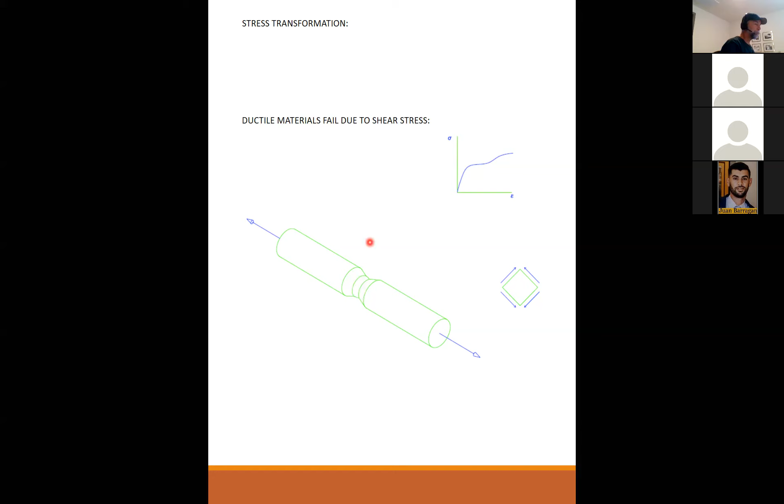Tensile loading causes the section to neck down and fail with a characteristic cupping due to shear stress.

So if you put a brittle material in torque, it's actually going to fail at a 45-degree angle. This is a diagram of our little stress element, and what it's saying is that it has plenty of shear stress capacity, but it's going to take this rotated coordinate system and fail along the principal stress of tension. This is why we're talking about principal stresses, because the material, if it is weakest in tension, will find that rotation that produces the greatest tensile component, and that's what it fails on. So in this case, it's at 45 degrees, because if you rotate this 45 degrees, you get the maximum principal stress.

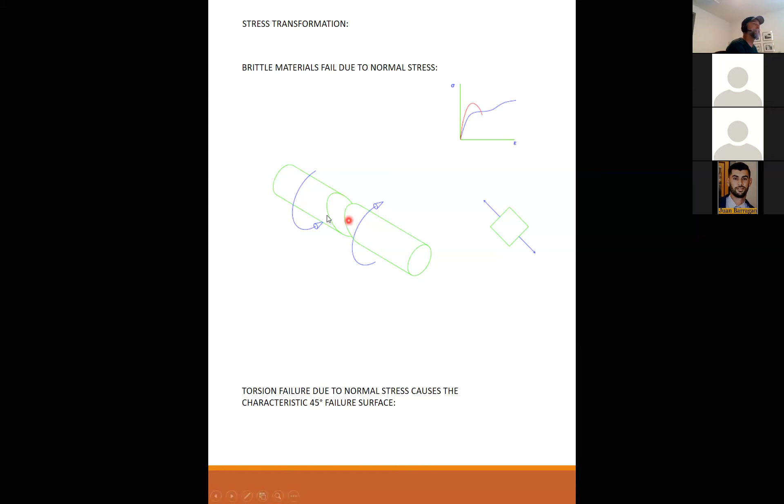If you want to see this, I still remember it like yesterday. When I took this class as an undergrad, back in the days of chalkboards, the professor took out a big stick of chalk and said, all right, you don't believe me? He twisted that piece of chalk and it broke, and he passed it around the class, and it looked exactly like that, because chalk is a brittle material.

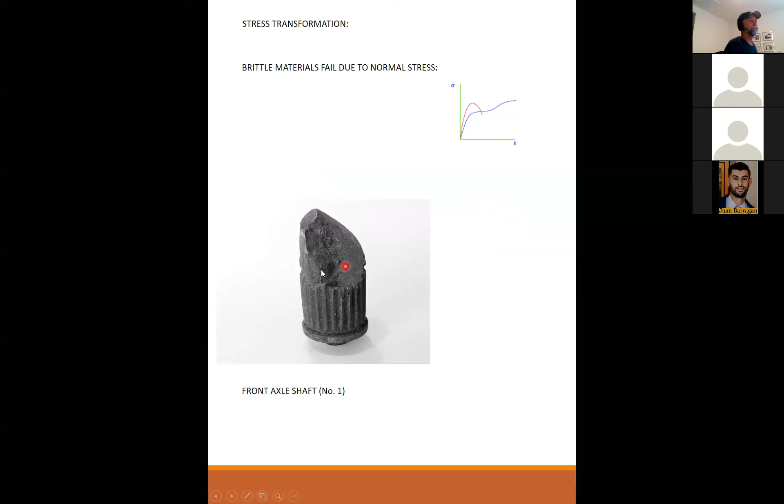Another real-world example: this is the failure surface of a front axle shaft from an undisclosed location of a Toyota 4x4. Front axles were not the strongest axles on the planet, so this is an example of a broken front axle shaft. From this diagram, would you say that my front axle shaft used to be brittle, or did it used to be ductile? The answer is it was rather brittle. It failed on a 45-degree surface, it's kind of hard to see, you have to hold it in your hand. And the grain of this, you can kind of see that it is actually a tensile failure. It fails in normal stress.

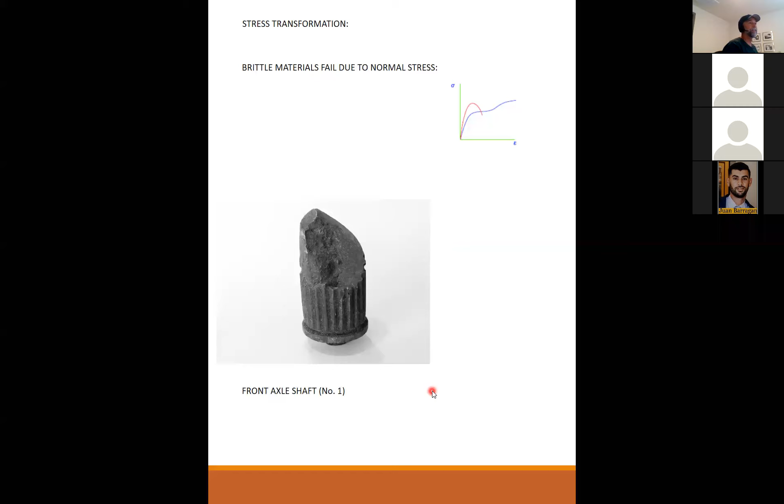I know what you're all thinking: how many axles did I go through? I went through 3 before I finally ponied up and got a whole new axle housing and chromoly, super duper warrantied-for-life axle shafts, and then I never broke another one.

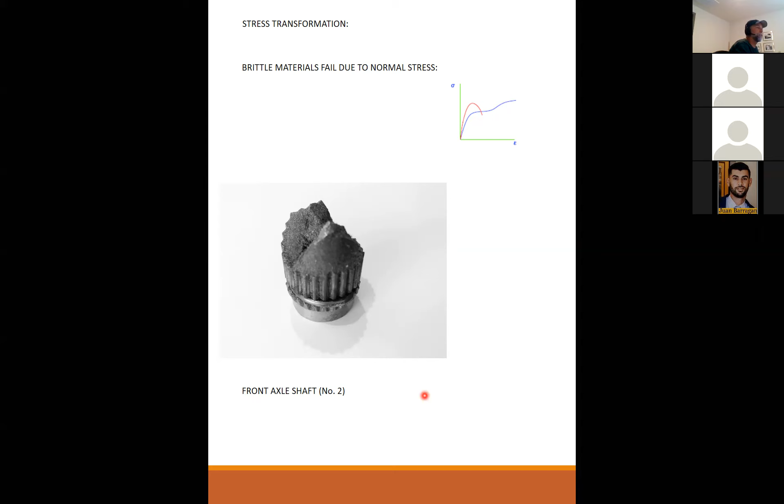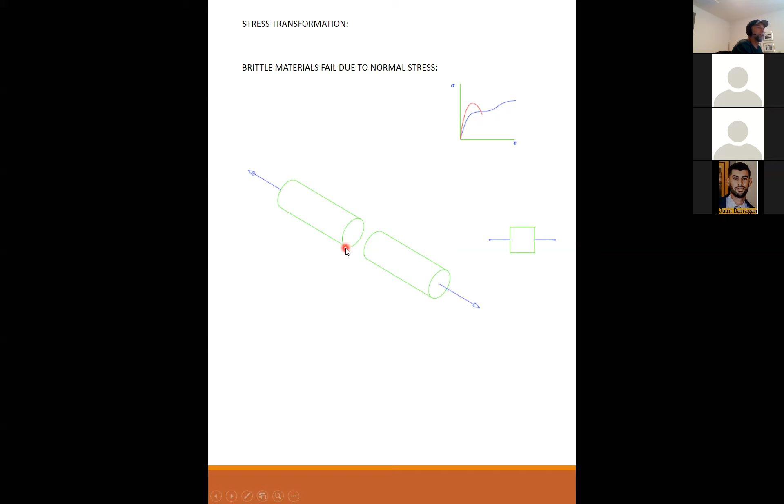And so if you take a brittle material and just pull it — picture this could be iron, or this could be just a cylinder of concrete — and you put it in straight tension, it will fail in a clean break, just like that.

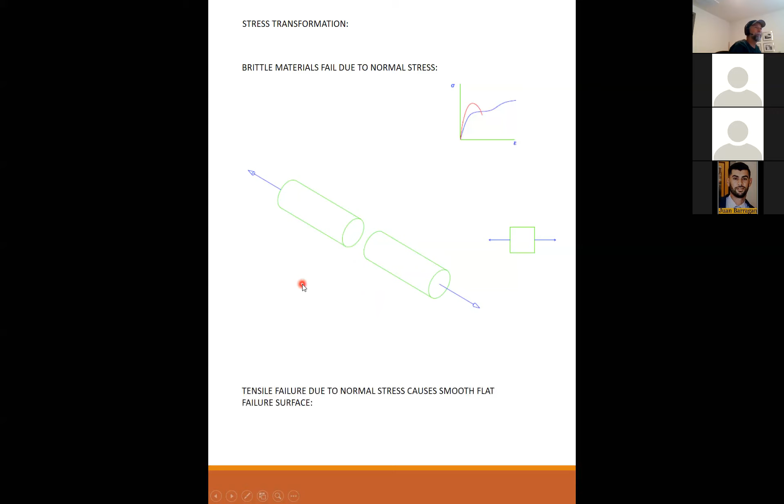Okay, any questions on brittle or ductile materials?

Anybody wondering why a steel axle shaft was brittle? Yes, why? Oh, from heat. Yes.

Steel axle shafts were hardened. So what they did is they took steel and hardened it through various processes of heat treatment and whatnot. The point was to make that axle strong. They really were trying to maximize the strength of that axle. But whenever you take a raw material and you either cold work it or heat treat it, or do these various industrial processes to raise the strength, you always give up ductility.

So actually I can go back. I won't take too much time on this, but right here, the blue line and the red line could almost be the same material. The blue line might be the raw steel in a very ductile form, but you could take the raw steel and cold work it or heat treat it. And this is the final strength there of the ductile material. This is the yield of the ductile material. And you can work it so that you can really get that strength up much higher than it was before.

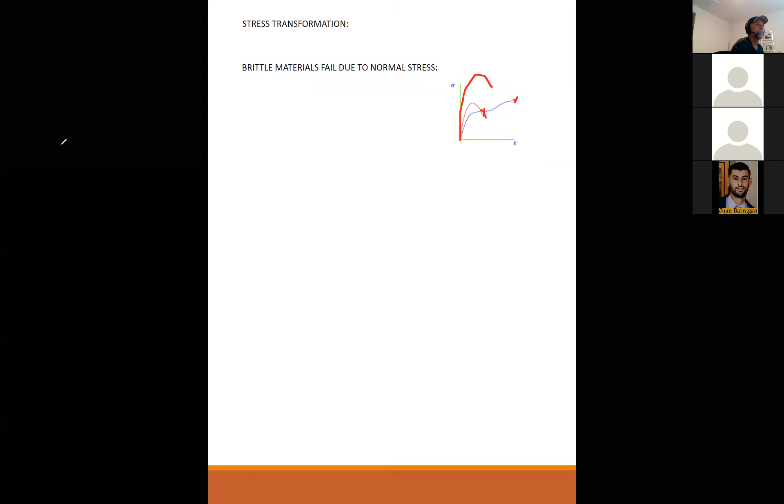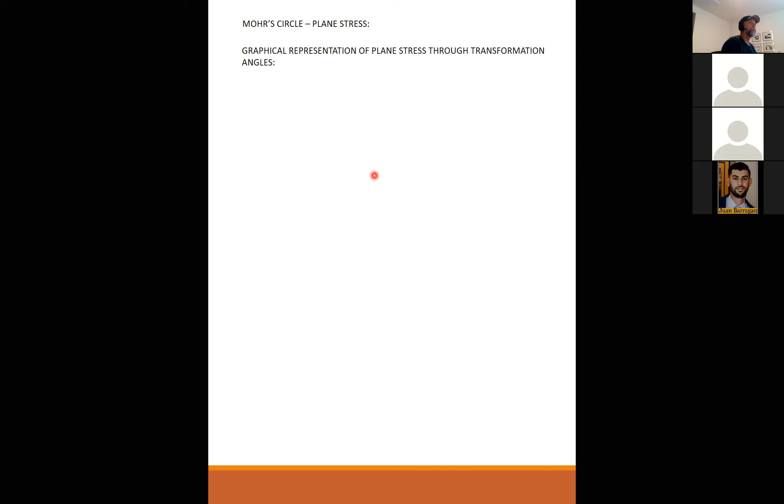Mohr's circle. This is our graphic way of describing stress transformation. So it's a graphical representation of plane stress through the transformation angles. Starting with our equation for transformed normal stress, this is our result from last time, that sigma x prime is equal to, this is basically the average stress, and then the transformation of the cosine and sine.

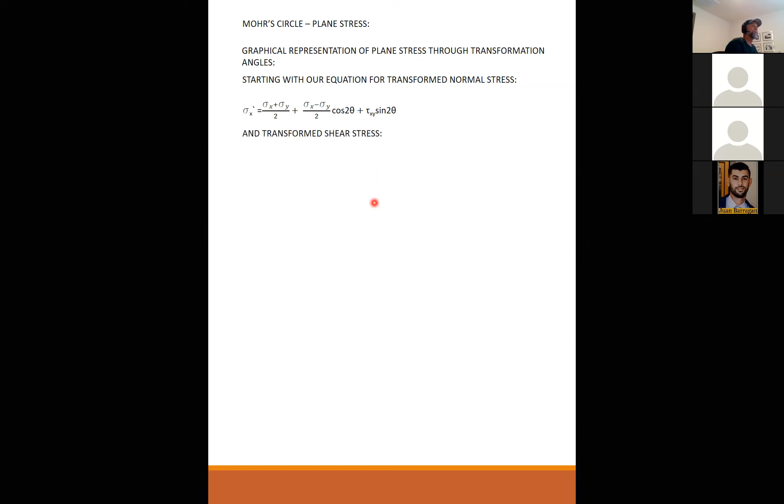We can start with this equation and the transformed shear stress, tau x prime y prime. And by squaring and adding each equation, we can eliminate theta. So we can combine these two equations and basically wash out theta. And by doing so, we get this, a squared term and a squared term, squared term, squared term. And since sigma x, sigma y, and tau xy are all known constants of the problem, that's the beginning of the problem, then we can rewrite this whole thing...

...as sigma x prime minus sigma average squared plus tau x prime y prime squared is equal to r squared, where sigma average is sigma x plus sigma y over 2, and r is equal to, so I just basically squared this whole part, rewrote this. So the radius of a circle is equal to these terms in here. And sigma average becomes the center of the circle, and r becomes the radius of a circle. That graphically represents the transformed stress state.

Any questions so far?

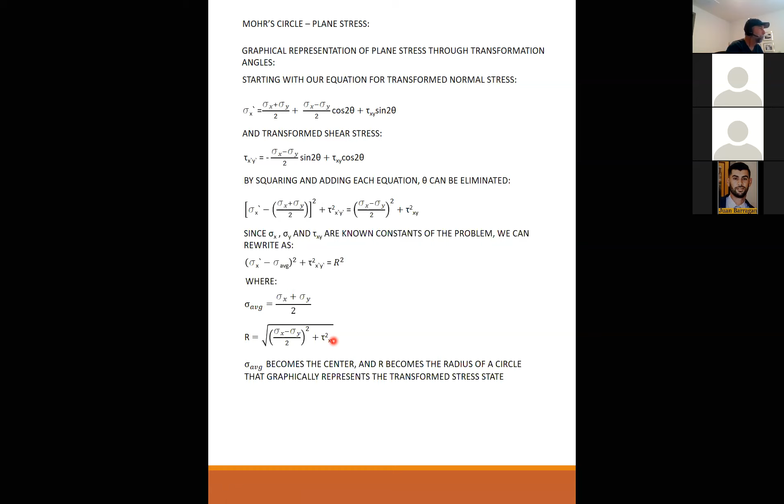Okay, so how do we do it? How do we plot Mohr's circle? First, we construct a positive coordinate system. And this is the part that usually throws everybody for a loop. This horizontal axis is normal stress. The vertical axis is shear stress, and it is positive going down.

Why is it positive going down? Because if Mr. Mohr had made it positive going up, then it would have the wrong direction in the positive rotation. I think that's why. So really, this is just the way it has to be in order for it to make any sense. But remember, positive down for the shear stress, positive to the right for normal stress.

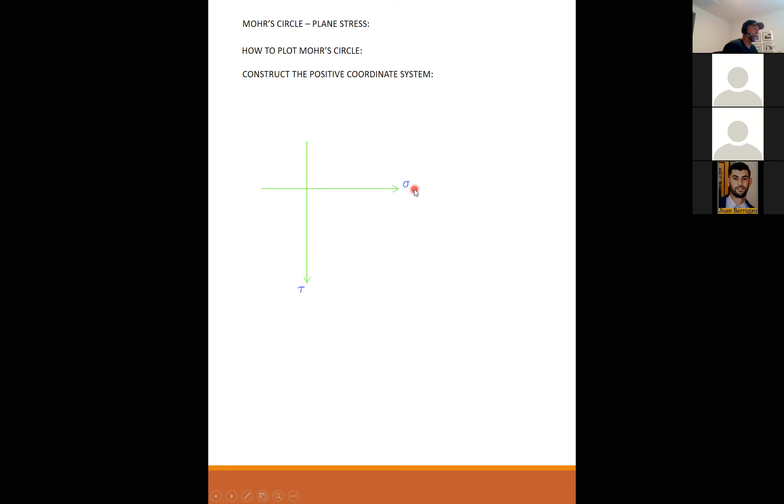Positive normal, positive shear. The angle on this circle that you're about to see, the angle that's in this circle is going to be 2 theta. Just like in the equations, it was 2 theta. This angle is going to be 2 theta.

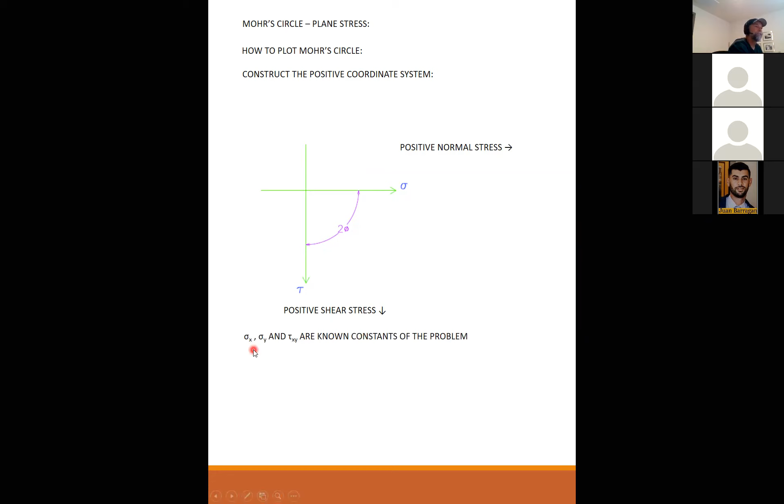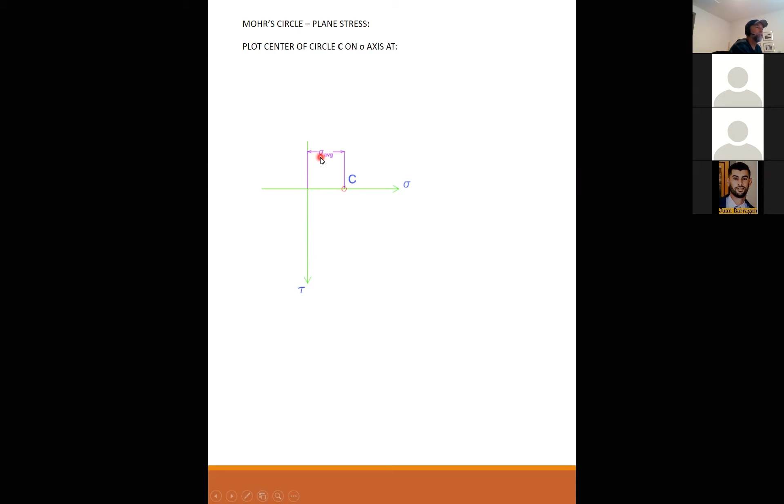Again, sigma x, sigma y, and tau xy are known constants of the problem. So we start by plotting the center C on the sigma axis. So this is 0, 0 at the crosshairs. And so we go in the positive direction, sigma x plus sigma y over 2, sigma average.

Next, we're going to plot our reference point A at sigma x, tau xy. Remember, these are known quantities from the problem statement. So if sigma x is positive, I go over in the positive direction. If tau xy is positive, I go in the positive tau direction, and I plot point A.

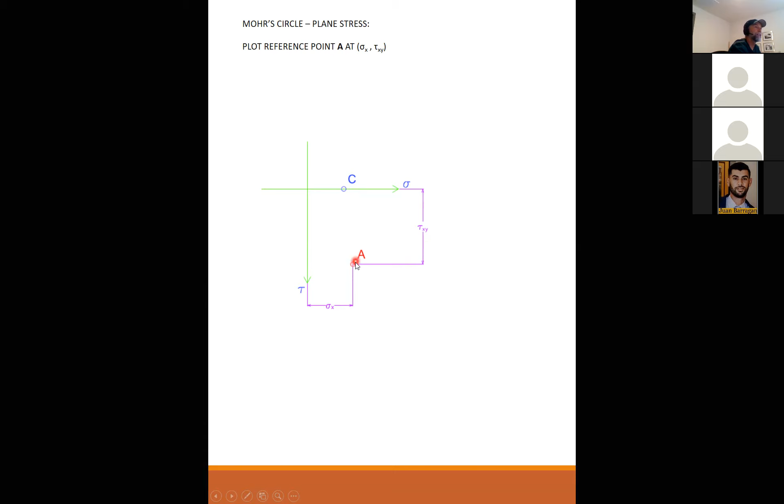Then if I connect a line between C and A, this is called my reference line. And this reference line represents theta equal to 0. It might be a little confusing.

Let me pause here for a minute. Remember our original element looked like this, and this is x, and this is y. And if you do a rotation, let me do a different color here. If I rotate the coordinates like so, then this is x prime. And this is the angle theta between the two.

If that angle between the two is equal to 0 degrees, then x prime is equal to x, right? You haven't rotated at all. That's what this point is right there, at a rotation of 0. So the stress at this point is the stress at the original coordinate system. Hopefully this will make more sense in a minute, but that's why this angle to the horizontal is not equal to 0 - this is the reference line. This reference line represents the original orientation of the grids.

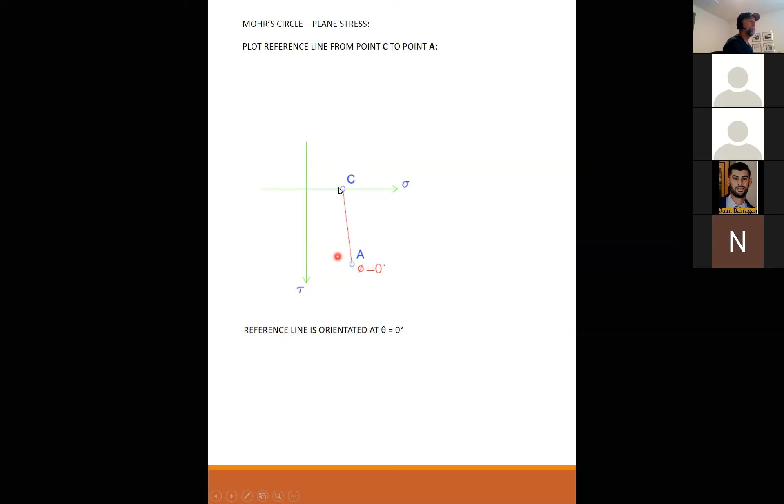Please, for all of you on the call, ask questions because I don't know where to elaborate if I don't know where you're hung up. But let's forge ahead and hopefully this starts making sense. So the point is, point A is where we start. This is our original set of stresses and we haven't rotated at all.

So the next thing we do is draw a circle. The circle is centered on C, and it has a radius such that it goes through this point here, which we plotted with our original stress condition. The radius of this circle, as we found earlier, is the square root of sigma x minus sigma y over 2 squared plus tau xy squared. That's this distance right here, which if you run the number is an actual number - it's so many KSI.

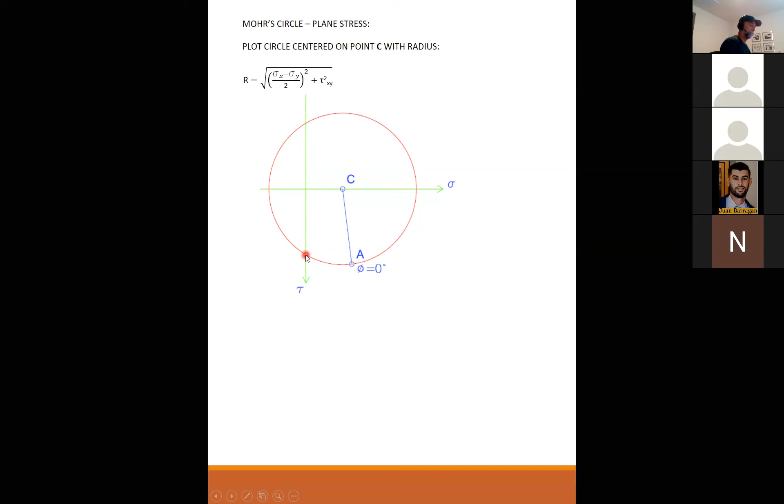Okay, so now we're going to add points B, D, E, and F around the perimeter of this circle. Let me reiterate that when you move along this circle by an angle, you're transforming the original system, rotating it by that angle. So point B represents an angle that is this much of a positive angle.

Counterclockwise is positive. So to get from A to B, you have to rotate this many degrees. But remember, this is 2 theta, so you're actually rotating half this many degrees to get to B. Then you're going to rotate this many degrees to get to F, D, and eventually E. These are all rotations around this circle.

So if I have an arbitrary point G, G represents the stress at sigma x prime and tau x prime y prime coordinate system, and G has been rotated in the positive direction by theta. What I drew on the circle is 2 theta, but what's actually been rotated is theta.

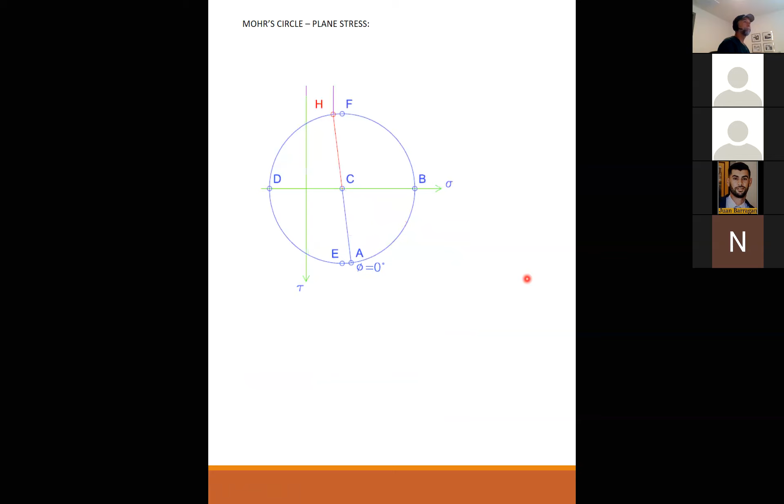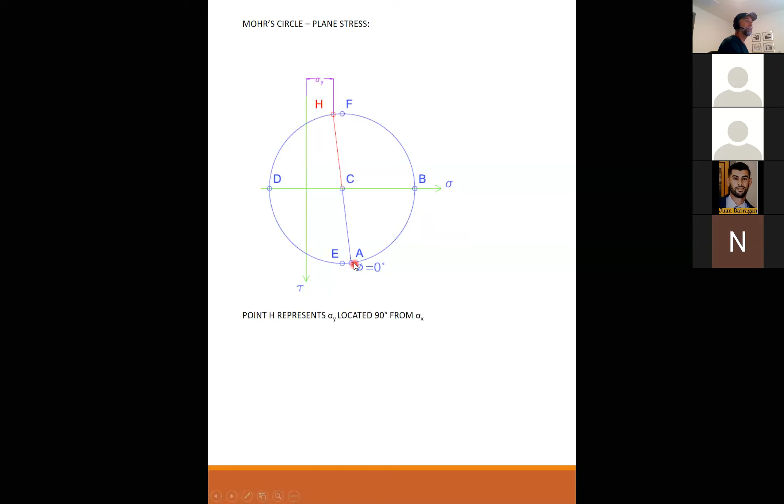Point H represents sigma y. Remember, sigma x was down here. Sigma y is located on the circle 90 degrees from sigma x. So 90 degrees on the circle is 180 degrees, 2 times theta. A 90-degree transformation angle is plotted at 2 theta, or 180 degrees, on Mohr's circle.

Okay, any questions, or are you guys ready for the first example? I have a question. Yes.

Is there any significance to the points at like maximum shear stress and no normal stress on the circles? Like, do they have any significance in equations, or not really? No, they do. They do.

Remember the last lecture, one of the last things we did is we talked about principal stresses, and we came up with an inverse tangent equal to theta p, and we solved for theta p. And then we had this rather ugly equation that solved for sigma 1, sigma 2. Well, sigma 1 is this point right here, sigma 2 is this point right here. Then we had a tangent, or inverse tangent, equal to something, something, and it gave you theta s, the rotation to get to the maximum and minimum shear stress. And then we solved for tau max and tau min, cranking out the equation. Those 2 points are E and F. So yeah, there's a significance to the 4 corners, graphically representing what we just solved for in our last lecture.

I have a question. Yes, please. So clockwise rotation is positive and counterclockwise rotation is negative? Correct. Okay. No, wait, what?

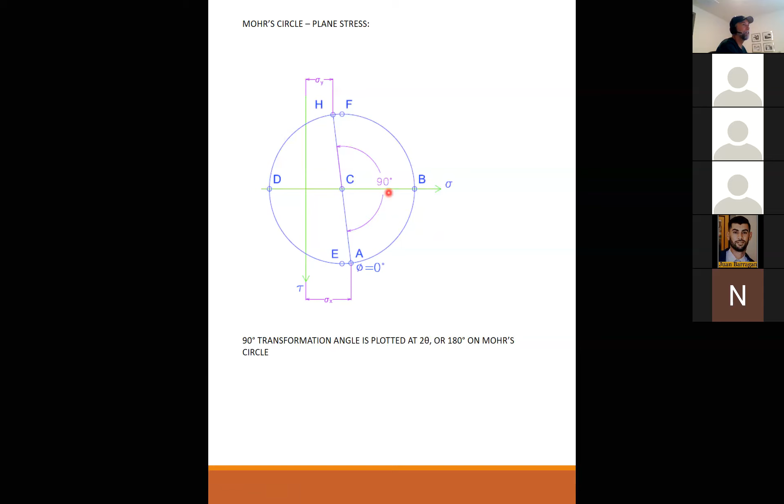Say that again? I'm just reading off the PowerPoint. So clockwise rotation is positive. No, clockwise rotation is negative. Oh, counterclockwise is positive. Did I do that backwards? I was reading it off the PowerPoint. If you slide, yeah, right there actually. I did that backwards. Oh, okay. So counterclockwise is positive, okay, clockwise is negative. Alright, got it, yeah, I gotta fix that. Okay, thank you for bringing that up because that's not what I said and that's not what I meant to say.

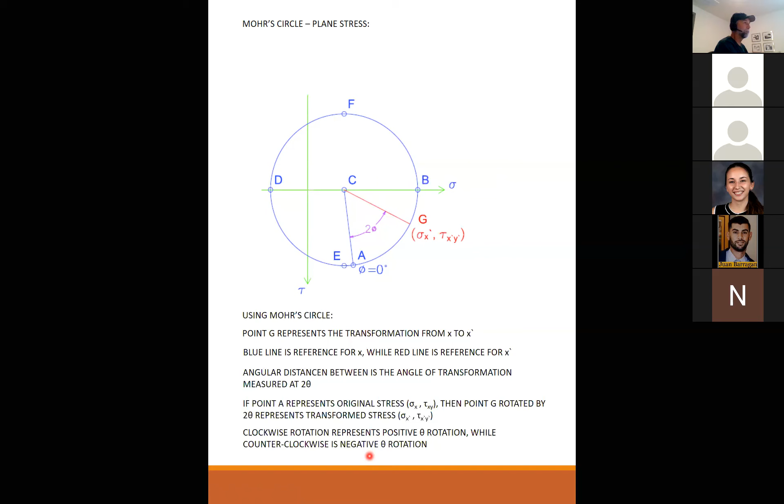Can you repeat where the typo was again? Of course, slide 56. Slide 56, and it says clockwise rotation represents positive while counterclockwise is negative. It is the exact opposite of that. In fact, that is so grievous that I'm going to fix it right now.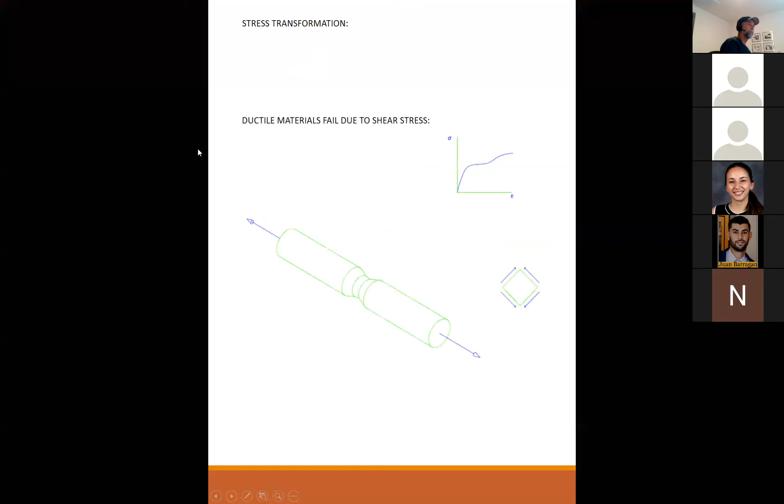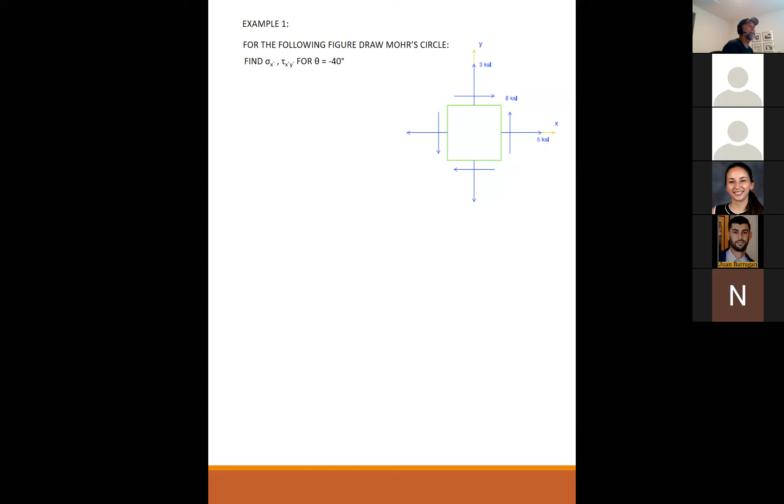Okay, so example 1. Following figure, draw the Mohr's circle. You will recognize this from the last lecture. We have 5 KSI tension in the x, 3 KSI tension in the y, and a positive 8 KSI shear stress. We want to use the Mohr's circle to find sigma x prime, tau x prime y prime for theta equal to minus 40 degrees.

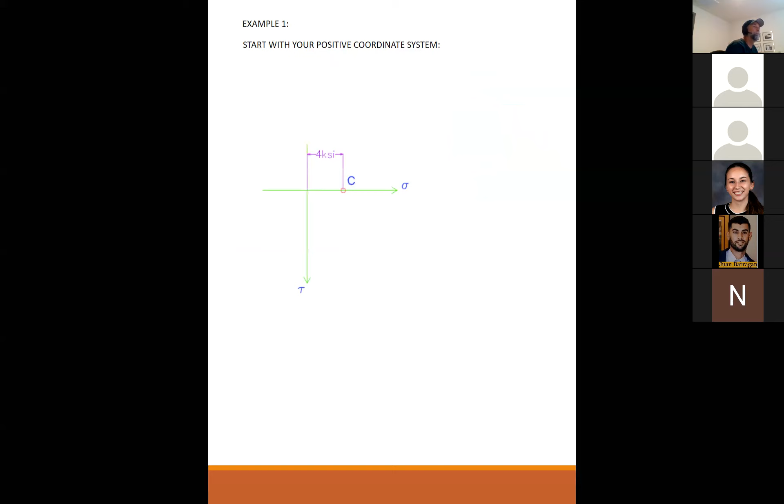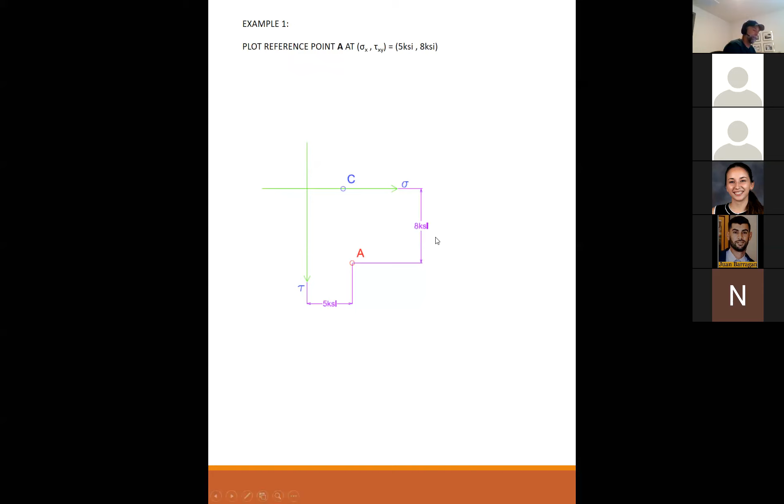Okay, so we're going to have to draw the circle. To start, we find the average, which is 4 KSI. We need to find the radius, which is 8.062 KSI. So we start with our positive coordinate system and put our center at 4 KSI. We put reference point A at sigma x, tau xy: sigma is the horizontal, so that's 5, and positive tau is down, so that's 8. We draw our reference line from point C to point A, representing theta equal to 0 degrees.

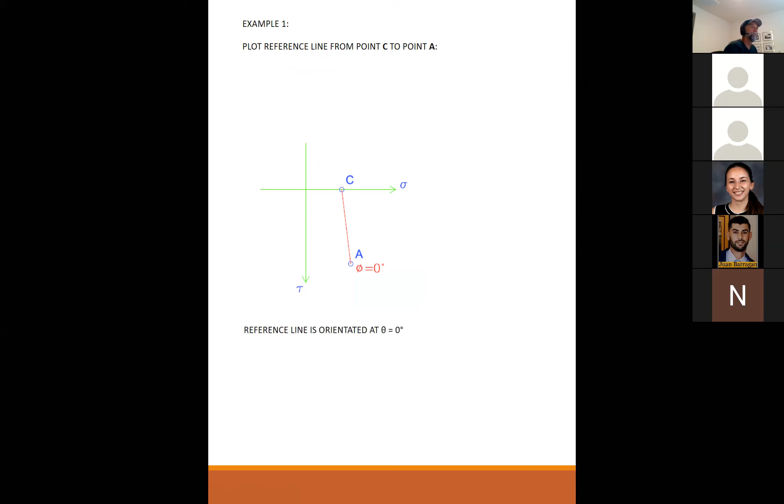And then we draw our circle with the radius of 8.062 KSI. This is actually one benefit of using PowerPoint - when I drew this on the dry erase board it was very difficult to get this to be a circle and to be to scale. So this is actually drawn to scale.

Any questions so far? Can you say that one more time please? I don't think I got it.

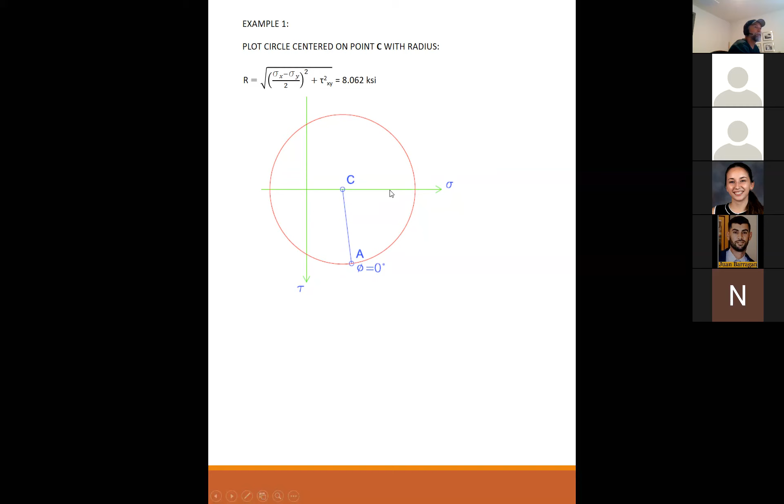Okay, so the radius we found last slide, right there - the radius is 8.062. And C is 4 KSI from the zero point. So this is 4, and the radius is 8.062. With that, you can go 4 plus 8.062 to get to 12.062. You can go 4, and then up gives you minus 8.062. And then 4 minus 8.062 is minus 4.062. And E is at the average of 4, but you go down, which is positive 8.062. So you can find the 4 corners by using the center and the radius.

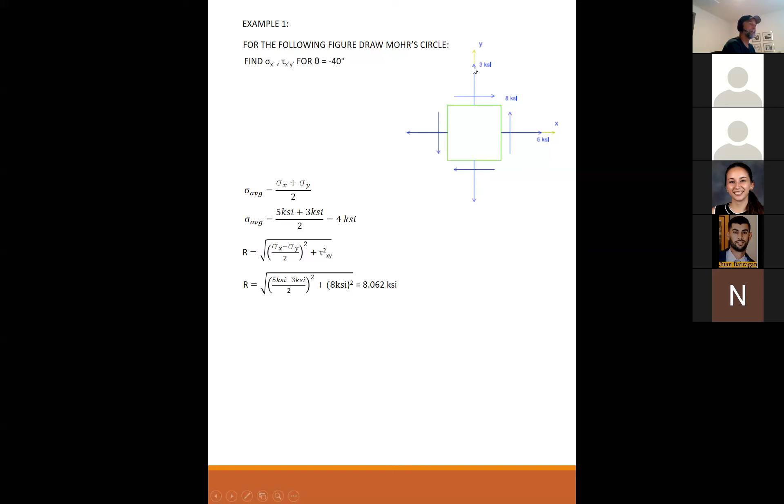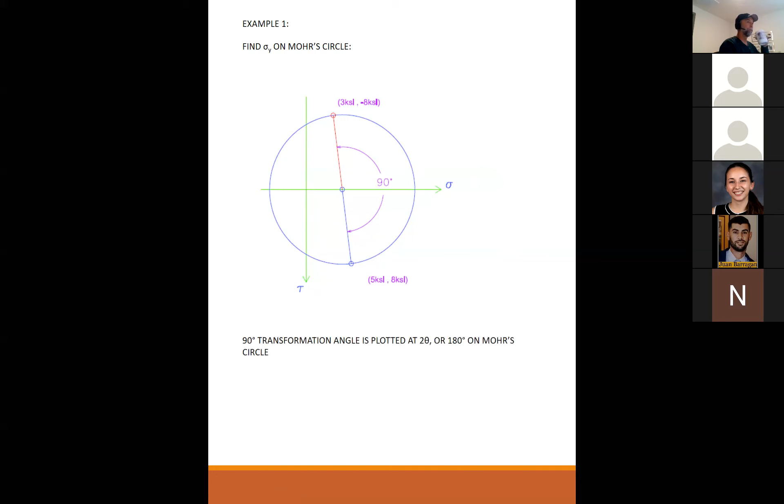Okay, now back to the problem statement. We want to find sigma x prime, tau x prime, y prime at minus 40 degrees. So minus 40 degrees is clockwise. Clockwise is negative. That's why it's very important to fix that.

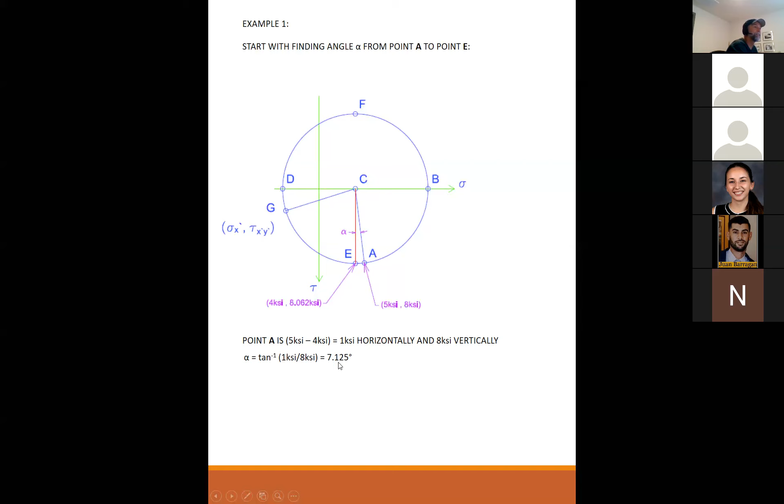So the strategy is find how far you are from a horizontal or a vertical, and then use that to get the missing angle. What you need is the angle between where you want to be and a horizontal.

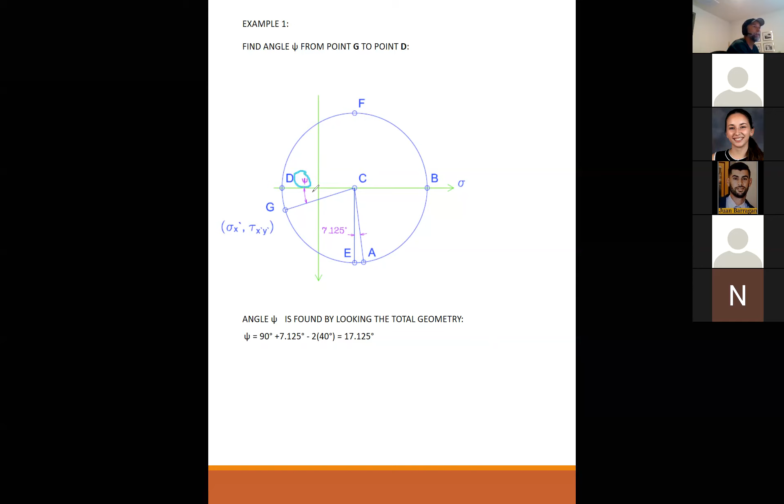I want to find psi. That's what I need in order to use sine and cosine to get to this point. But what is psi? So you have to look at what do you know. What you know is from horizontal to vertical is 90 degrees on the circle. And you know that this is 7.125 degrees from what we just did. So now what you know is this angle all the way to this line, A.

But you also know the angle, use a different color. You know the distance from line A to this line here. You know that because that was the problem statement. That's minus 40 degrees. But minus 40 degrees on the circle is minus 80 degrees. So now you just add it all up. You have 90 plus 7.125 minus 80 gives you 17.125 degrees. Got it, thank you.

Okay, so that got us that angle. Once we have the angle, it's just straight up trigonometry to get the horizontal and the vertical. The horizontal is measured from your center point, so you've got to take the 4 KSI out of it, and that gives you the horizontal to this point here.

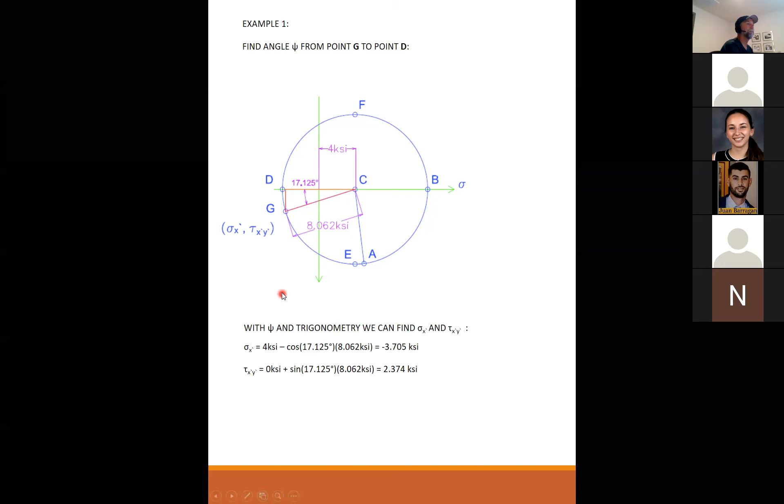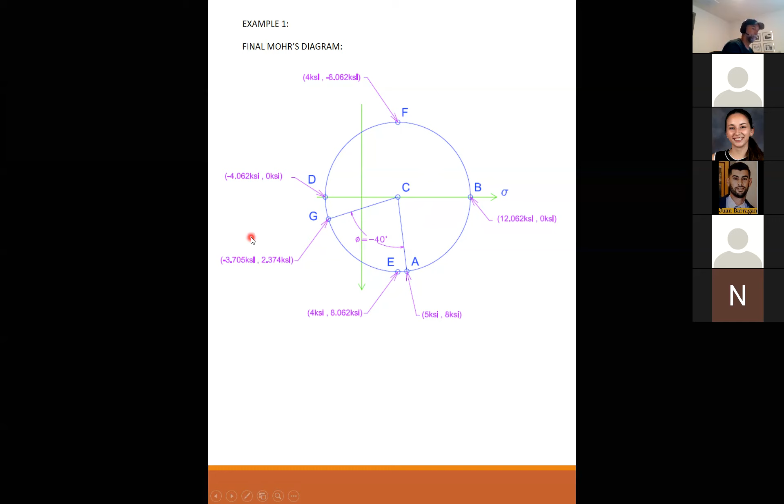So now from Mohr's circle, we have all these points. Point A is our original sigma x, tau xy. Point B is our maximum normal. Point F is our minimum shear. Point D is our minimum normal. Point E is our maximum shear. And then we have solved for point G. Point G, by definition, theta is minus 40 degrees, so we drew it on the circle as minus 80 degrees.

Okay, this is the same image. And so here's our friend. This is all the stuff that we solved for last lecture using the equations. So I'm going to plot those on the circle here so you can see how this works.

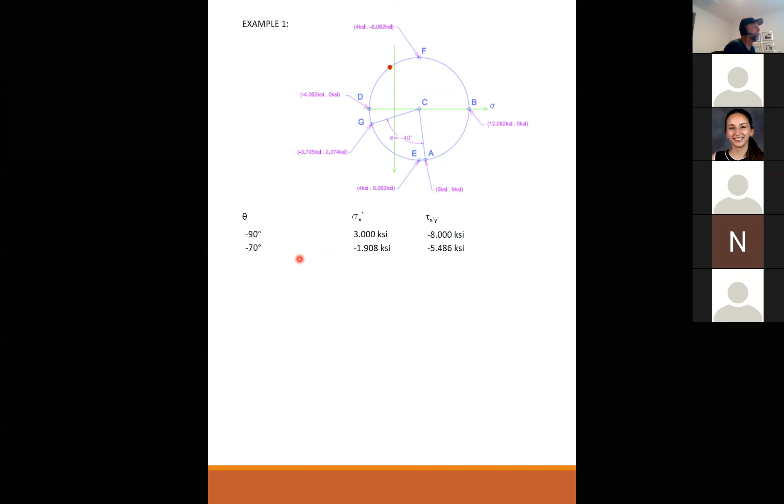Okay, before I keep going around the circle, is everybody tracking with me? Does this make sense? Anybody having trouble?

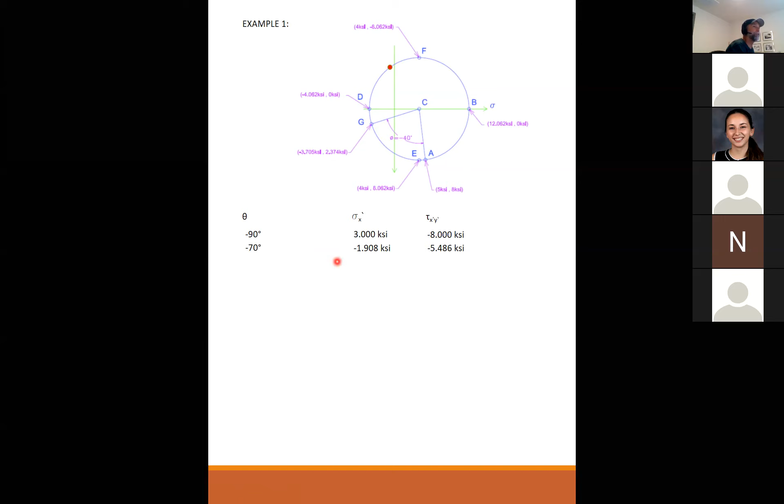Okay, so what I'm going to do is go around the circle with all these points that we solved for from the last lecture using the equations. So at minus 50 - again, this is minus 100 degrees on the circle - what we solved for was a normal stress of minus 4 and a shear stress of minus 0.4. You see how small that is.

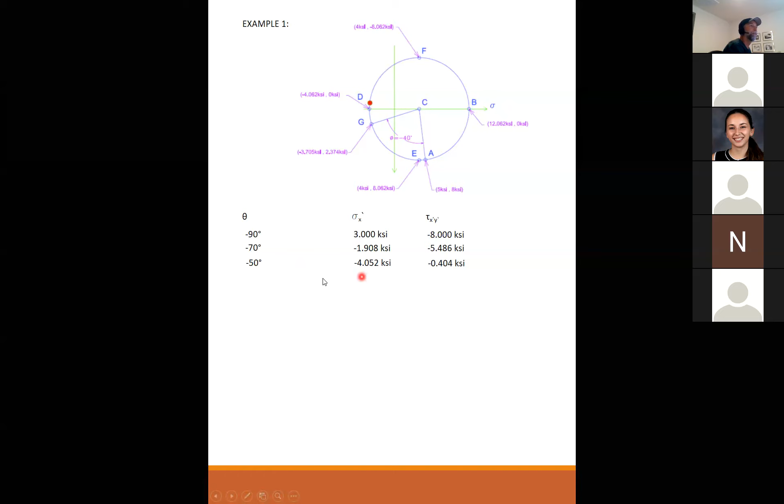So basically what I'm graphically showing is all of these answers that we got last lecture from the equations actually make sense on the circle. It all kind of falls together. I can go to minus 48.56, which is what we found last lecture was sigma 2, the principal stress where normal is minimum. So there's your minimum normal stress. You have 0 shear stress, and you've gone minus 48.56 degrees, which is this distance here, which would be double that - so just a little bit more than minus 90 degrees.

At minus 40 degrees, we just solved for this point here. Minus 30 degrees is here. Minus 10 degrees is here. So we got a normal of 2 and a shearing stress of 7.8. We're getting pretty high on the shear stress.

Here's point E, at average normal, maximum shear stress, and that's only 3.5 degrees. So that's why this was 7 - we just found this to be 7, that's twice the 3.5.

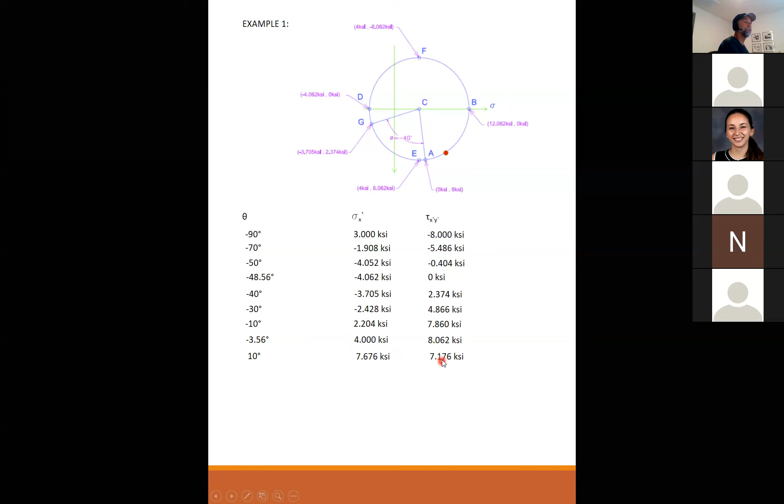At 10 degrees, we're starting to drop down from our maximum shear stress, and we're picking up a lot more normal stress. At 30 degrees, now we're getting very high on our normal stress and getting lower on our shear stress. At 41.44 degrees, we have maxed out the normal stress - we are at 0 shear stress.

50 is here, 70 is here, and 86.44 is our minimum shear stress and our average normal stress. And then we're back to 90. So we've gone all the way around the circle, hitting all of these points, and you can see how they fit. Most of these numbers we found from the equations, except for the minus 40 that we just did from the geometry. So that is Mohr's circle. That's how that works.

It can be very useful for finding points, if you don't want to find them from the equations. But it's probably most important for visualization—as we're rotating through circles, equations only show you one angle you're looking at. With Mohr's circle, you can see the whole thing right in front of you: maximum normal, minimum normal, maximum shear, minimum shear, and any point in between, all on the circle.

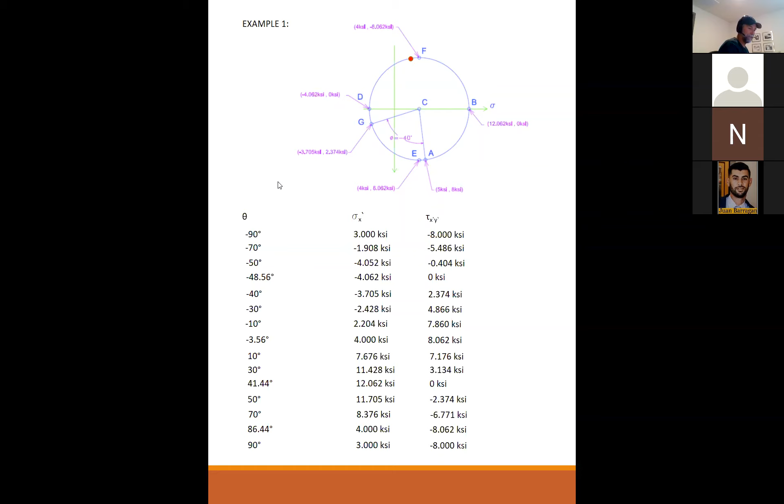Professor, before you go—yes. I have one quick question. Sure, I wanted to wait until everyone kind of left. But can you go back to slide 99? Can you still see the screen? No, I cannot. Okay, there we go, you can see it? Okay, yeah. And slide 99? Mm-hmm, okay.

Okay, yeah, that one. I feel like I'm having a hard time thinking about how we get from point C to point G. My brain wants to think of the radius as a vector—we start from point C and find that coordinate on G with 4 KSI as the starting point, then go back in the normal stress direction with cosine. Is it okay to think about the radius as a vector, or is that counterintuitive? Well, ultimately, the best answer is whatever works for you. However your brain sees it, then you see it, and that's great—it's better than not seeing it at all.

But the way that I taught it, and the way my brain sees it, is as a triangle. So this is your 17 degrees—there's an angle in there that's 17 degrees. If I have the hypotenuse, this is how I learned it: opposite, adjacent, hypotenuse, and an angle, angle psi or whatever. And even though the circle is doing something like this, that doesn't matter anymore—we don't really care at this point about the circle. All we're looking for is that point, and we're only looking for a vertical dimension to that point and a horizontal dimension to that point, because the stress at that point is defined. This is tau, and this is sigma.

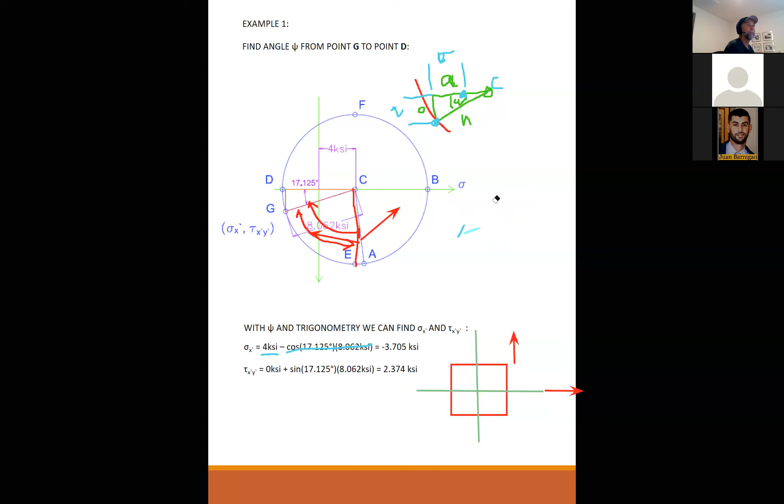Yeah, it makes a little more sense. I'm sure I'll get it down once I start working out problems and stuff like that. That always helps, yes. All right, but thanks, appreciate your help.